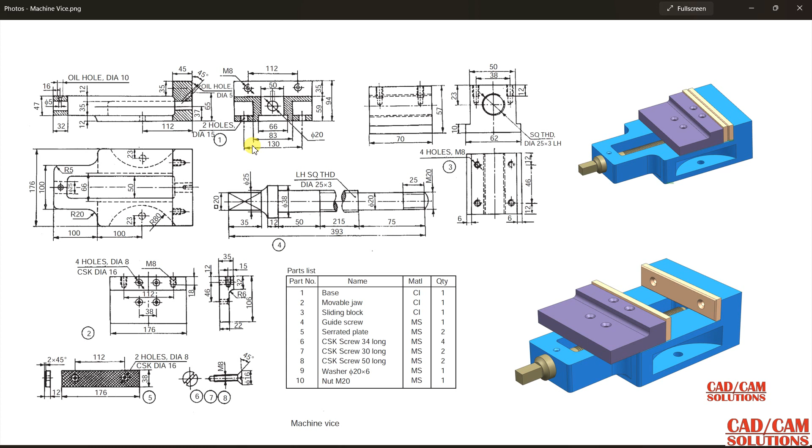So in this part I'm going to create this top view and this inside cut, and I will extrude this at 47, and a step is there which is a rectangular shape. This bottom shape is rectangular, 12 mm thick, and later I will create this upper portion and these holes. Okay, so let's start.

Okay, select this sketch, and I'm selecting this top plane, and now start with the rectangle and one more rectangle. Now dimension it and align with horizontal. Same here. Okay, now this distance. So this distance is not here. So this is 112 plus 200, 312.

The total length is 312. Okay, and this width is 176, and this is 100, and 100 from this side. Okay, and 100 from this. So first sketch is ready, and I want to create this inside portion.

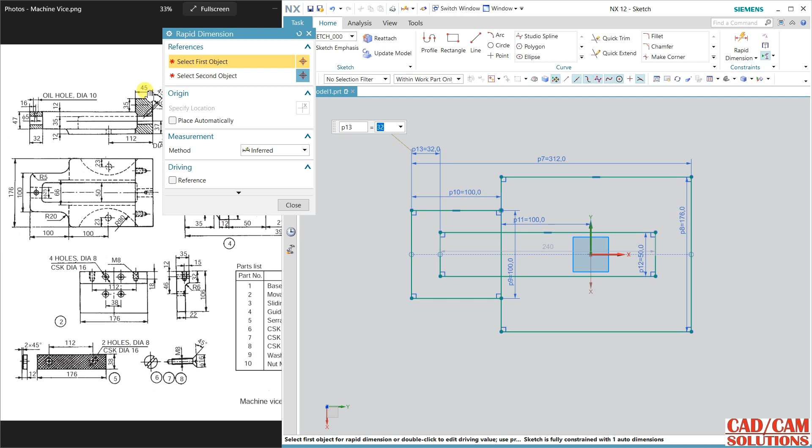So select this rectangle and draw this rectangle, and thickness is 50, so change it to 50, and align this with the horizontal. Now this distance is 32, so distance between these two is 32, and here it is 45. This dimension is not given, so I'm taking it as 40. If anywhere I find this dimension, then I will change it. Okay, so my first step is complete.

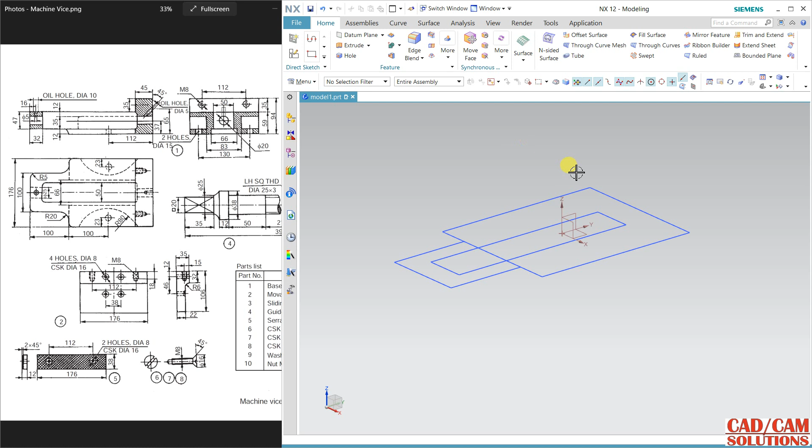Just finish it, and now I am selecting this extrude. So my first connected curve is this, and second is this. Okay, now extrude this 47 in reverse direction, and okay, so 47, and here we have this 12 mm thick, and

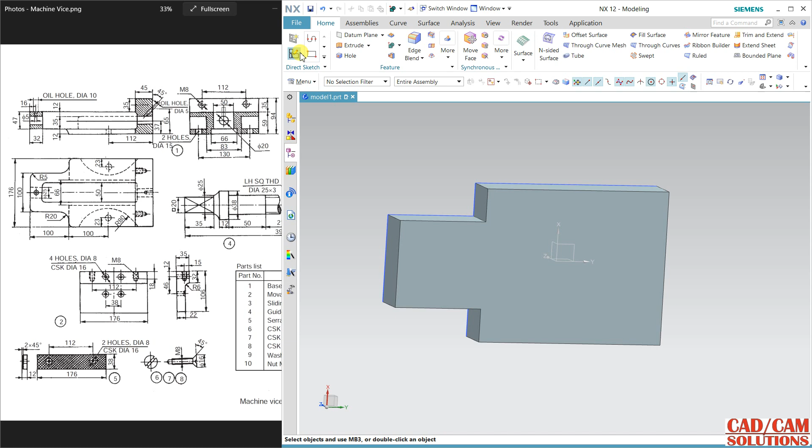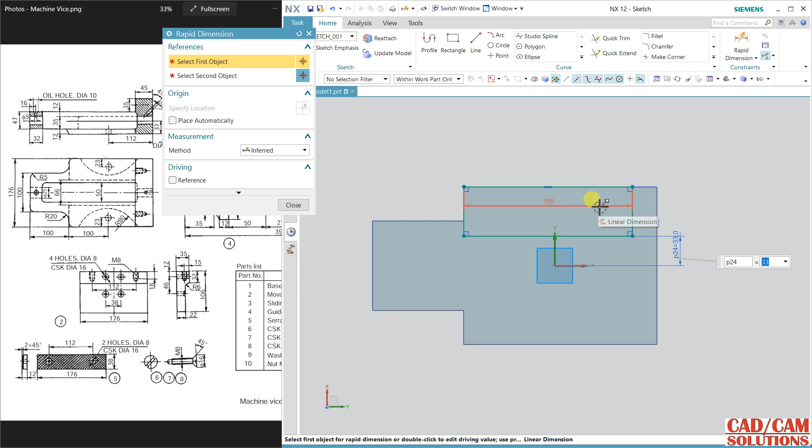go to back side. First unite both, and click at the bottom face, and I'm creating a rectangle, this, and this thickness is 66, means half of 66 is 33, so 33 from the middle, and this length is up to the last. So select this and select this line, make collinear.

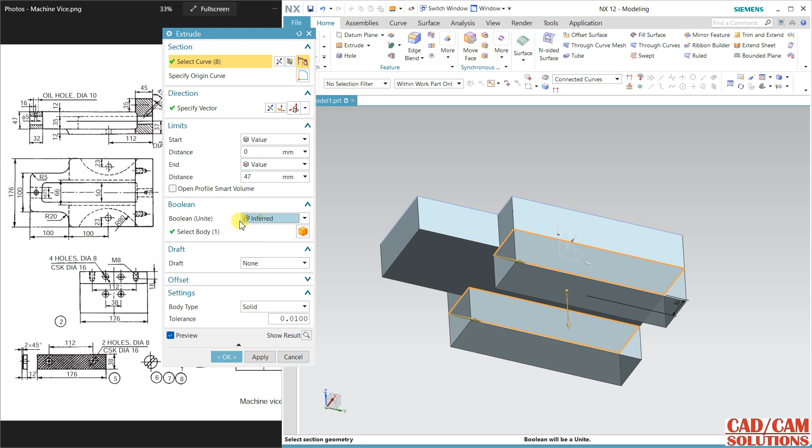Now I'm going to mirror this. So my object curve is this and middle line is this. Okay, now finish. Now extrude this and unite, and the thickness is 12 only, and click OK. Hide this sketch. Now from the front I am going to create this whole portion.

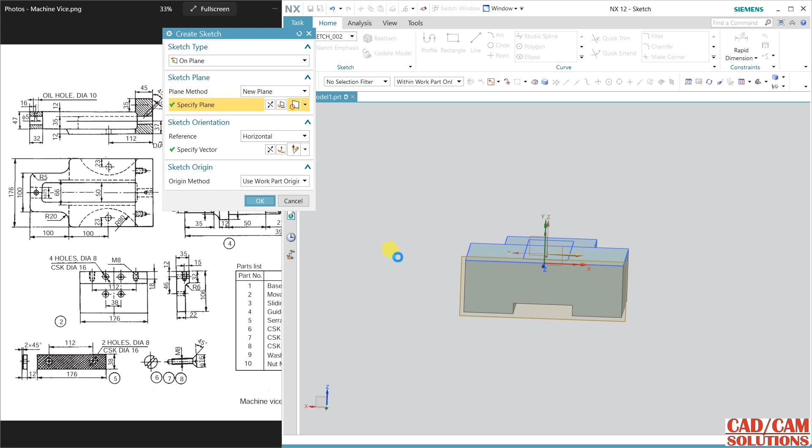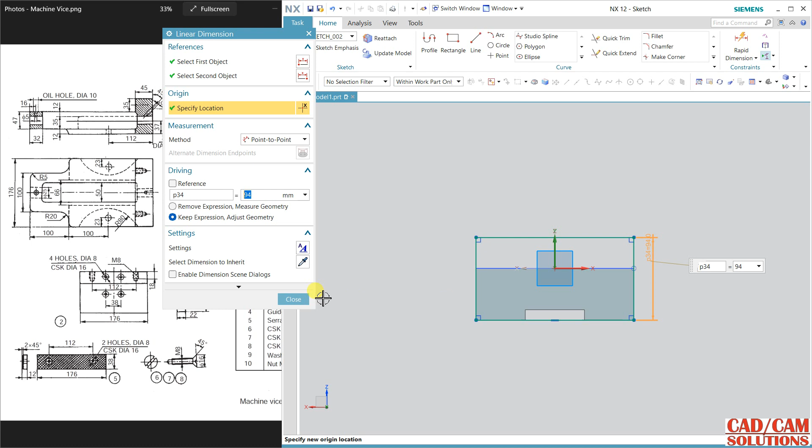So select from the side, and draw a rectangle. Select this vertical line and this point, make them constant so that the width will come the same as 176. Okay, and the height is 94 from the bottom. Here two holes are there, so no problem. We will create these after

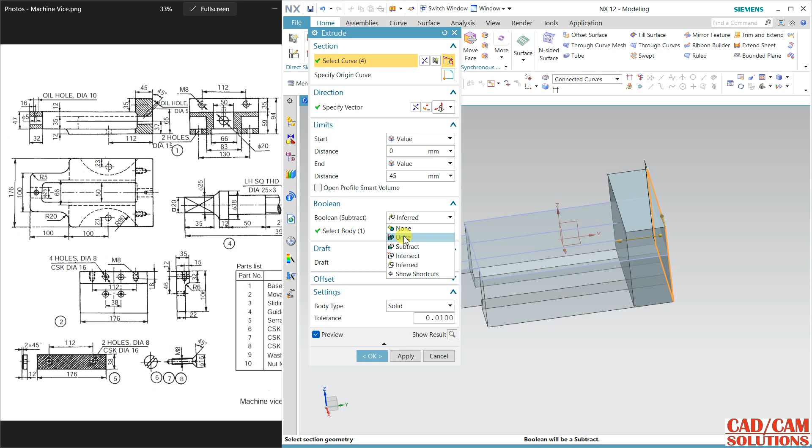extruding this. So select this, extrude, and this hole inside, and the width is 45, and unite this, apply. See. Okay, here we can see this is solid and it is also included in this, so it is the same.

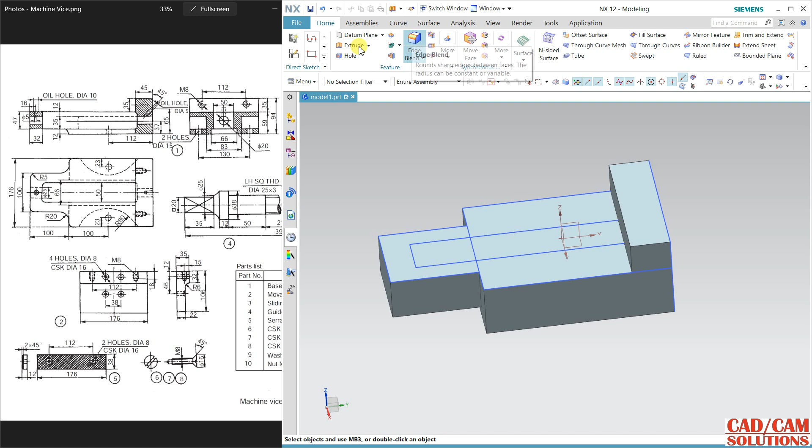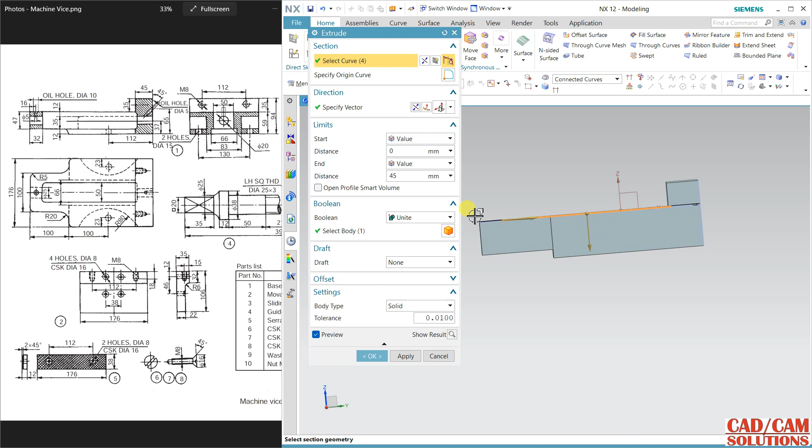Now I'm going to cut this portion, so extrude, select this, reverse direction, and cut this portion. We have to cut this up to this portion. Some slot is there, you can see, which is 12. Here it is 47, so change it to 47 and subtract and see what will come.

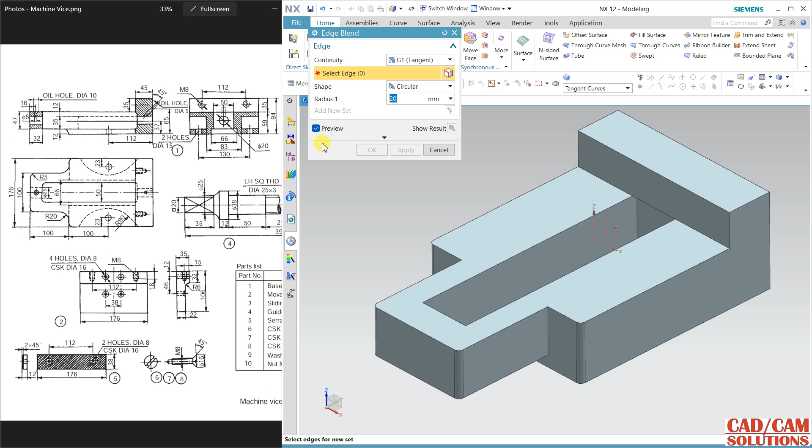Okay, now hide this sketch and this sketch as well, and now I want to apply some fillet, and 5 is the radius, so change it to 5, apply here and here and here and here and apply. And second, radius is 20, and this time my edge is this, and same here, apply, and 5 for this and this.

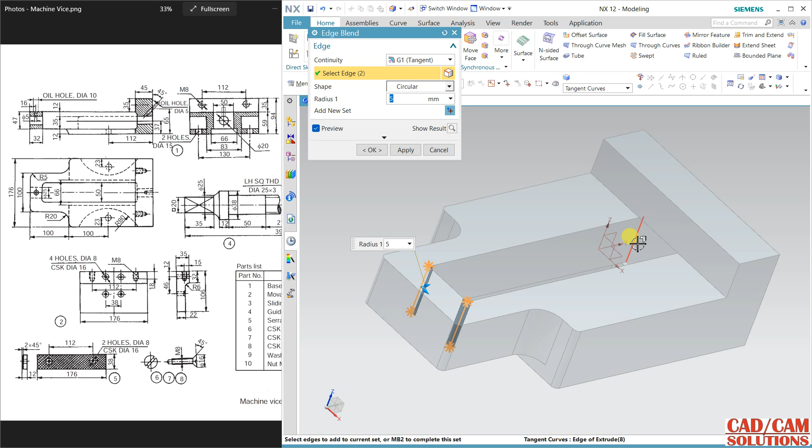Now I am just creating, and after creating I will take the section of this body and match it with my front and side view. And another section is there which is an 80 radius circle which is at 12 above. So my working face is this. Click OK, and now draw a circle, radius is 80 and diameter is 160, which is 100 from this.

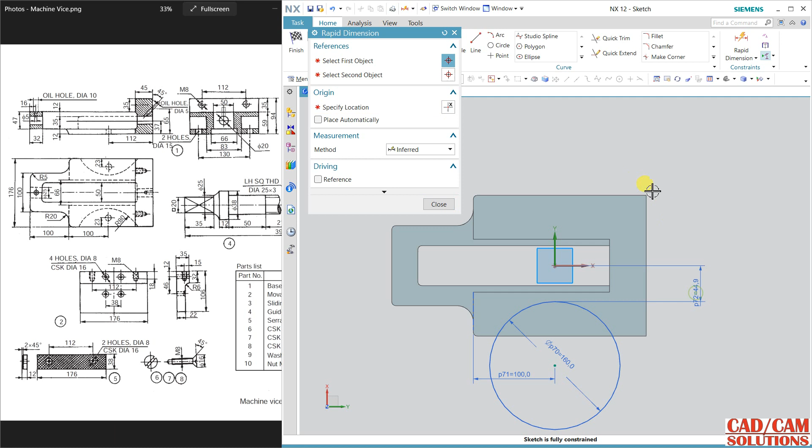Okay, and this 83 is this distance. So from here to this end point, click, and half of 83, and close. The sketch is constrained. Now mirror it about the horizontal axis, finish it and extrude this, and the thickness of this middle portion.

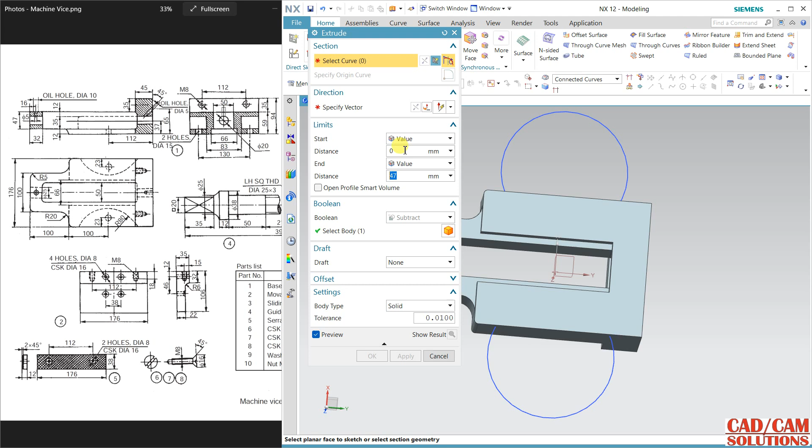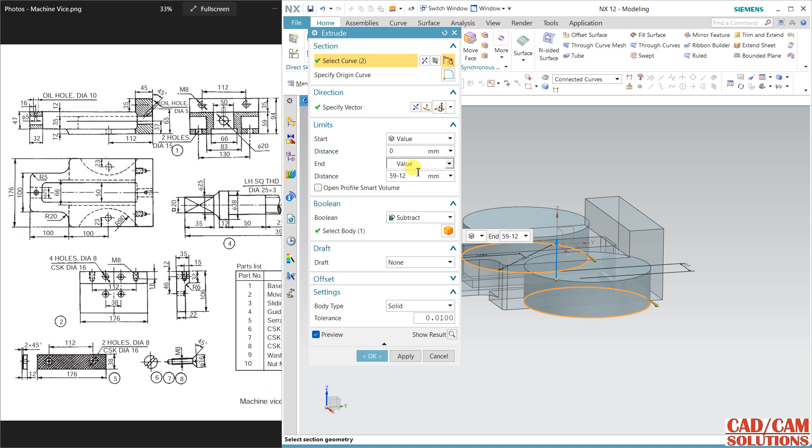So select curve and reverse direction, and the thickness is 59 minus 12. Okay, and click OK. Oops. And again 12. Okay, so 12, 12 at the two space we have 12, or this is 35. You can change it here, 35, and okay, hide this sketch.

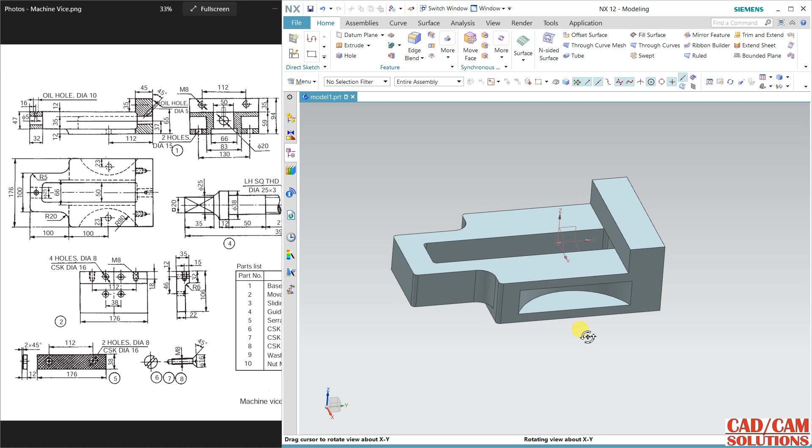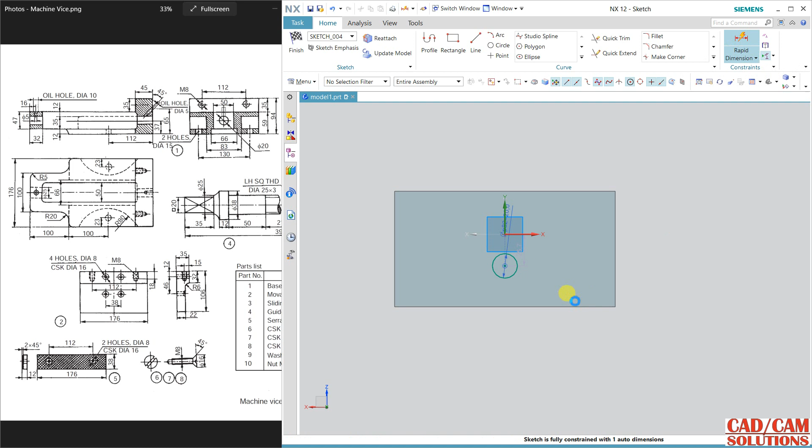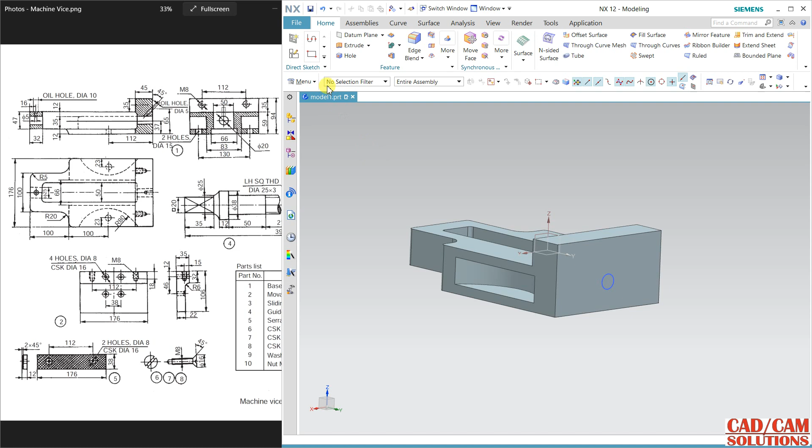Now some holes are there, so this is the first hole and one more hole here. So I am starting from this, so go to this space, select, orient the view. Okay, now we have a circle of 20 dia, align vertically, and the distance is 37 from the bottom. Okay, and again two dots. I need two dots for these holes, so I will do it later.

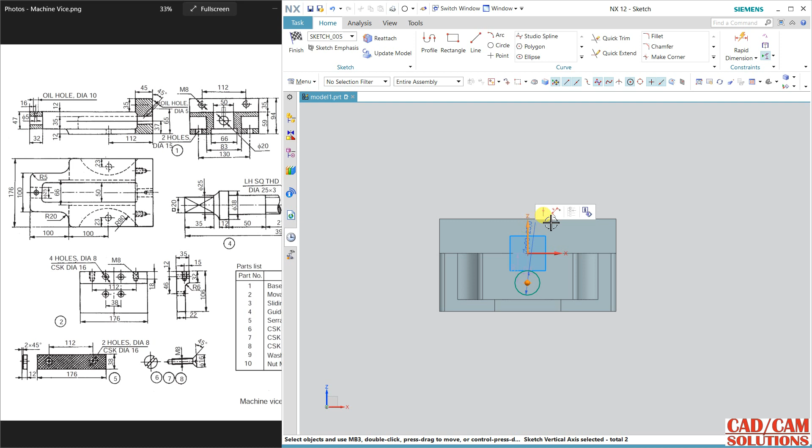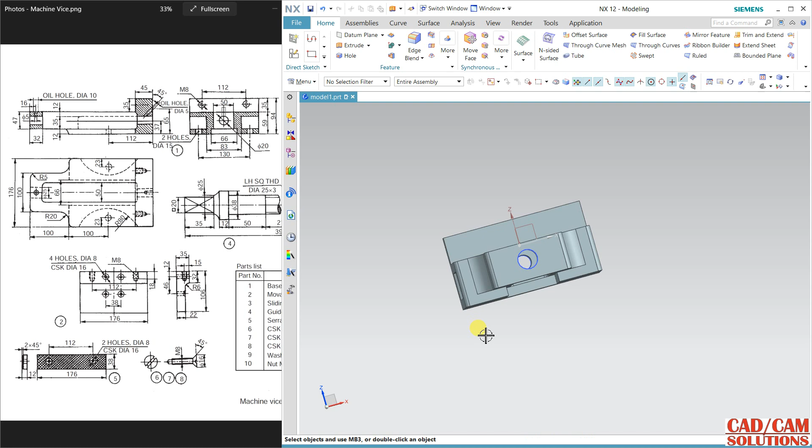Okay, see, now for holes we have to create over this face. Now I'm creating at this, and the diameter of the circle is 25. So click here and click, and 25 is the diameter. Align vertically, and distance from bottom is 37. Close and subtract it. Okay, both holes are concentric.

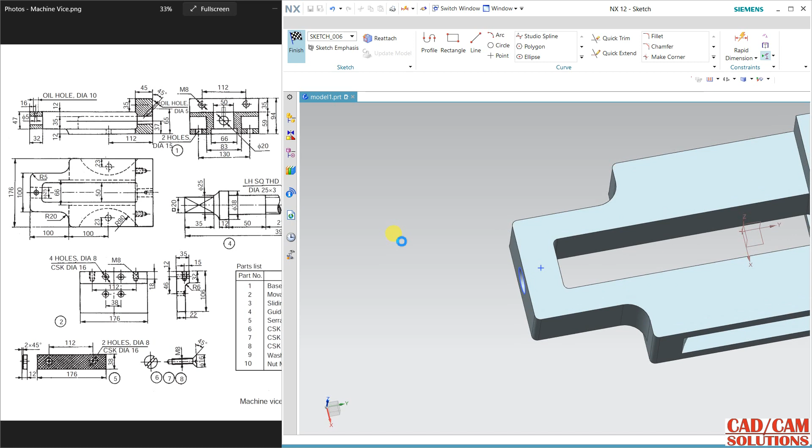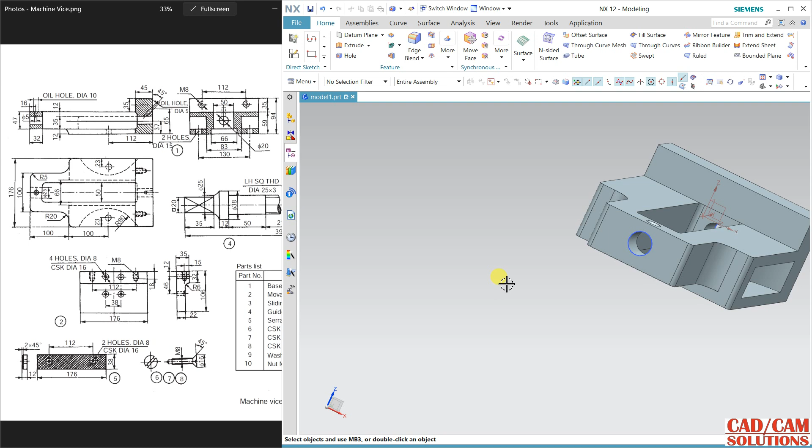Now one hole is there, so I am selecting this hole directly and click over this piece. This hole is aligned with horizontal axis, and the distance is 16 from the left. Finish it, and my oil hole is 10 diameter, and 16 is a countersink dia, and depth up to the hole. So reduce this, and okay. So oiling hole is done.

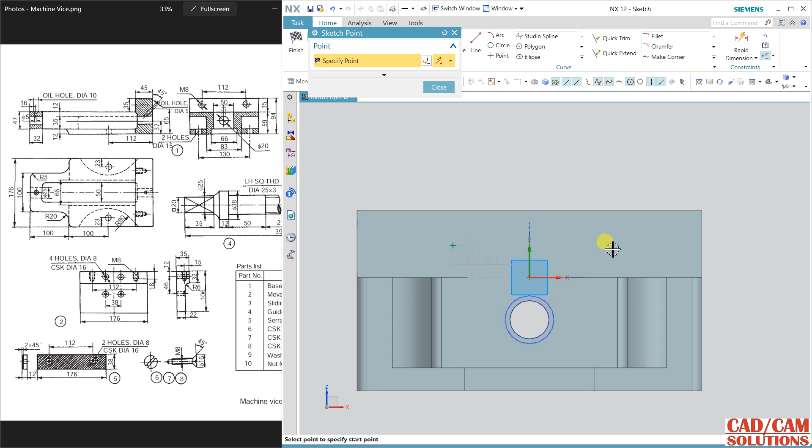Now we have to create these two holes which are on this face. So select this, okay, and click first point. Okay, now this point is half of 112, and this distance means how far it is from the bottom edge. Here it is not shown, no problem. I will take this from another view. We will get this.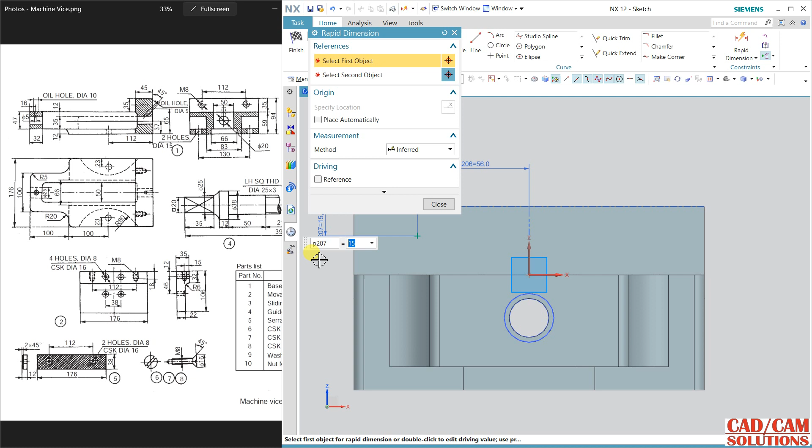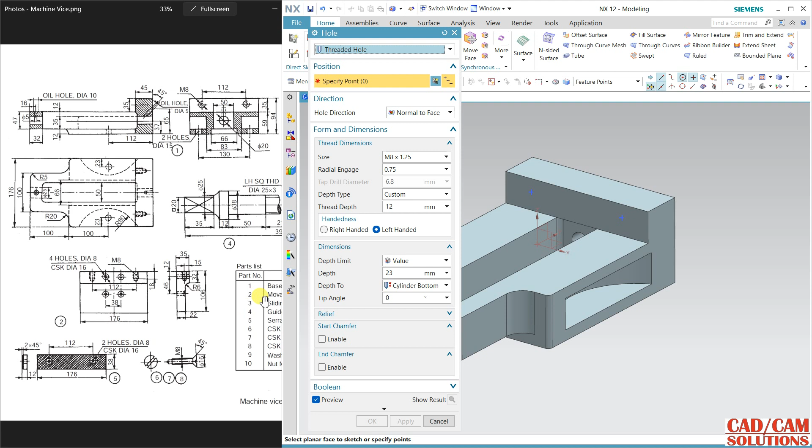So here we have these two holes, which are 15 from the top. So select from the top and 15. Now mirror this point, finish. Now use this hole command, and this hole is M8. So screw clearance hole, threaded hole, and M8, and the depth is this depth. We will take this from here, 18, and this 23, and click over this point and this point, M8 size hole, click OK.

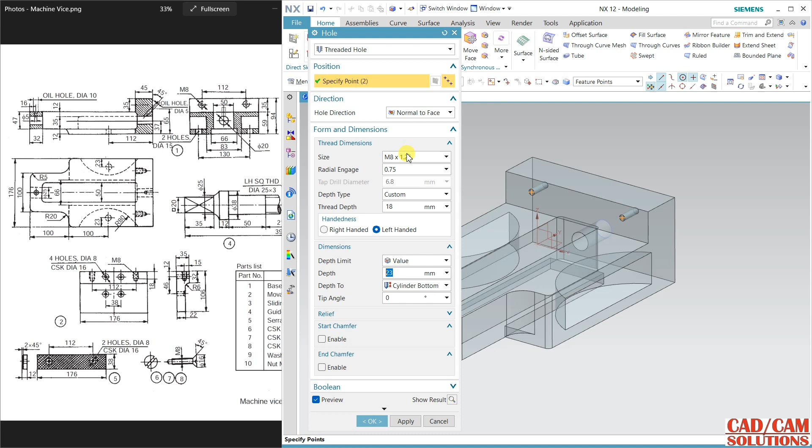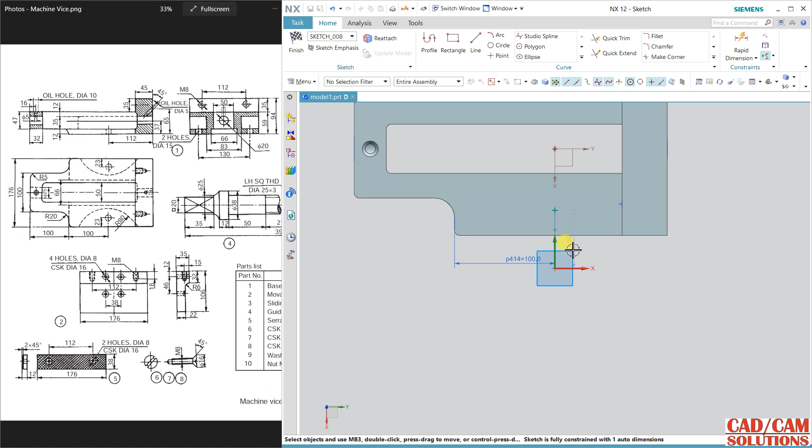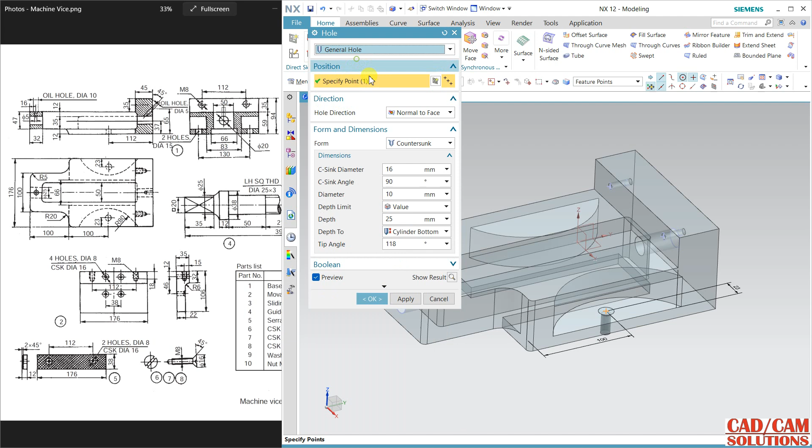Two holes are there, so I'm selecting this hole directly, click over this face and dimension it, 100 and 23, sorry, and close, finish it. And the size of this hole is 2 hole dia 15, simple hole, simple 15 dia. Okay, now mirror it. My reference plane is this, and okay, hide this sketch.

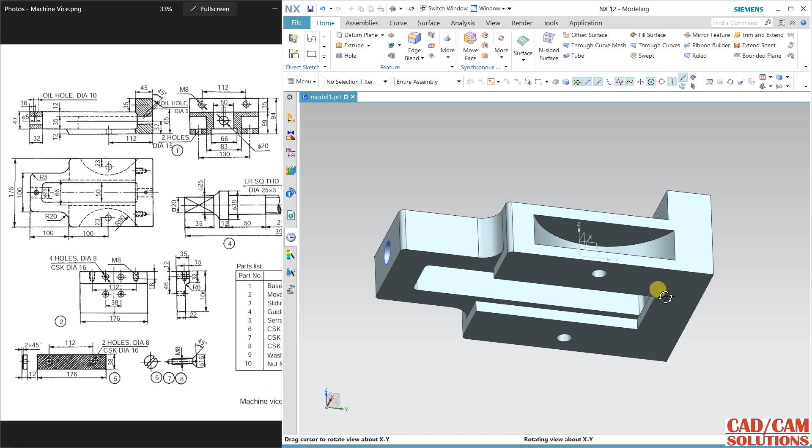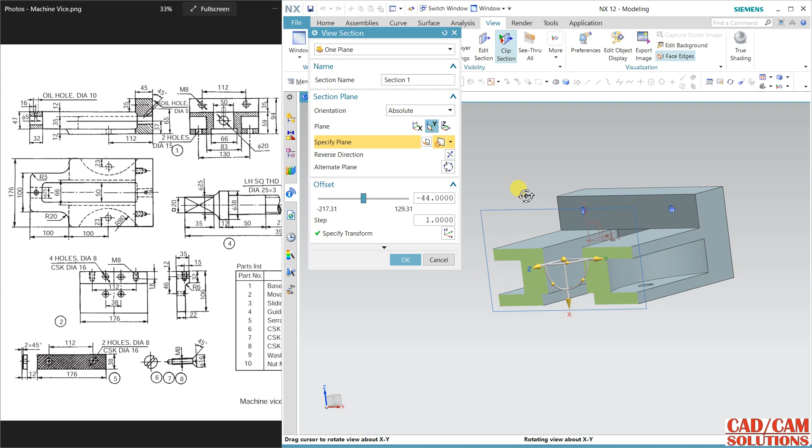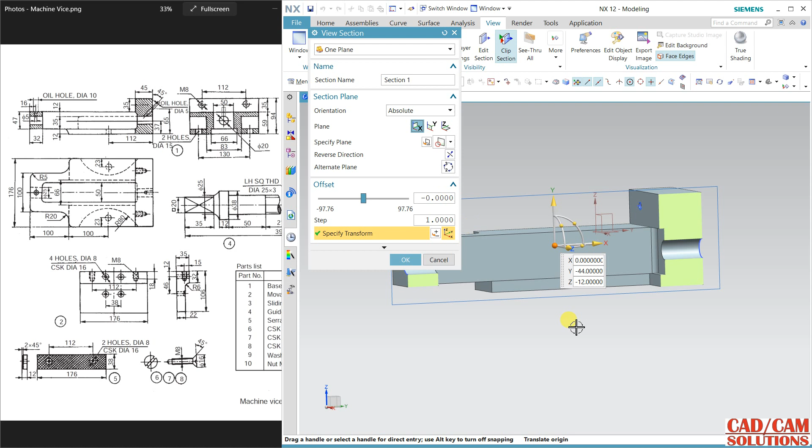And now I want to match my view with the drawing. So select this, edit clip, and see front view, and the hole is not coming, so cut it from the hole. See, okay, this geometry is matched. It is also matched to holes, M8. Okay, it is done. So this front view is properly matching. Now change this view to front, side view is matched, and front view is also matching.

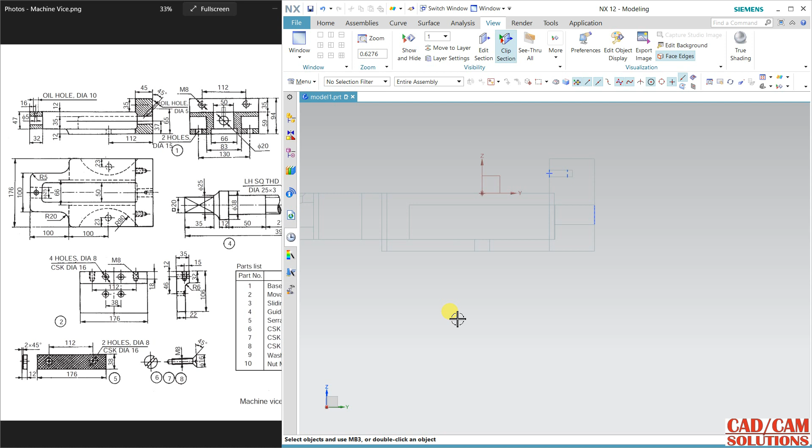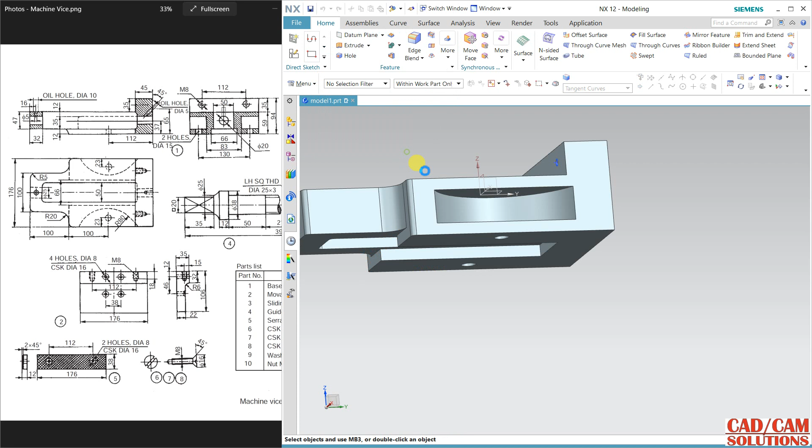And hide, right click and convert this into wireframe. So this is also coming, and this also. Right click and in shading, switch off, and apply one more fillet here and here, apply. So this fillet will come, see, here is a fillet. I think this fillet is 12 and it is not specified anywhere, so just double click over it and change it to 12 and see. Now it is properly matching.

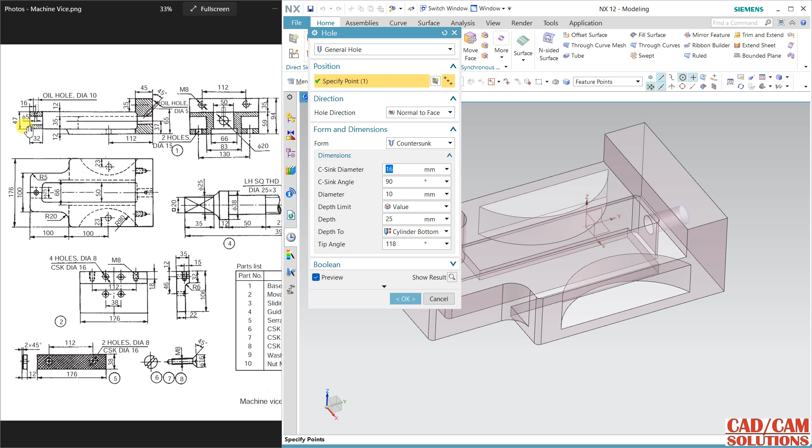Yes, and only this oil hole remains, otherwise rest of the things we have completed. The dimension of this hole I have taken wrong. The 5 is the diameter, and the countersunk dia is 10 and the main dia is 5, and click OK.